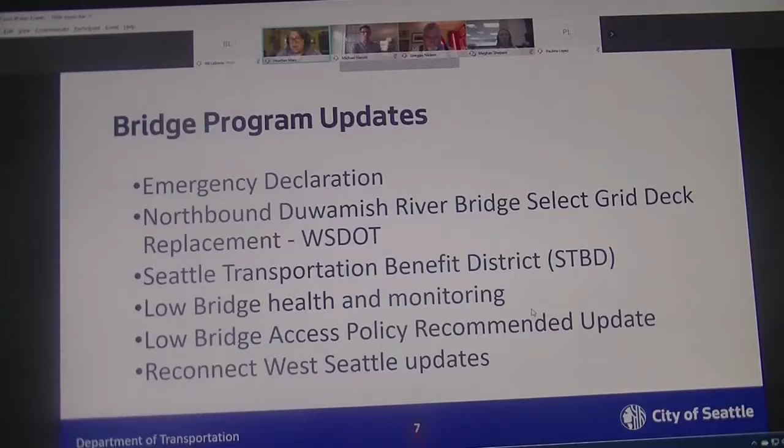I also want to talk a little bit more about the First Avenue South Bridge grid deck replacement, the Seattle Transportation Benefit District, some information about the health of the low bridge, as well as some access policy recommendations. And then I want to talk a little bit about the Reconnect West Seattle updates. So let's move on to the next slide.

So I didn't know this, but apparently it's called the Duwamish River Bridge. I think many of us refer to it as the First Avenue South Bridge. Perhaps you've heard that they are replacing those metal grates on the northbound bridge. The work started last week. We coordinated very carefully with WSDOT to ensure the work would happen at night when there would be the least impact, and fortunately we were able to open up the lower bridge so that while the First Avenue South Bridge is closed for those important repairs, you're able to use the lower bridge.

This work is going to be going on through the middle of August and through September or early October. I think we can all agree that any kind of bridge maintenance work, especially across the Duwamish, is extremely important. Even though the timing doesn't line up great with the problems with our high bridge, hopefully we can appreciate why it's so important for WSDOT to keep that First Avenue South Bridge in a state of good repair. Next slide, please.

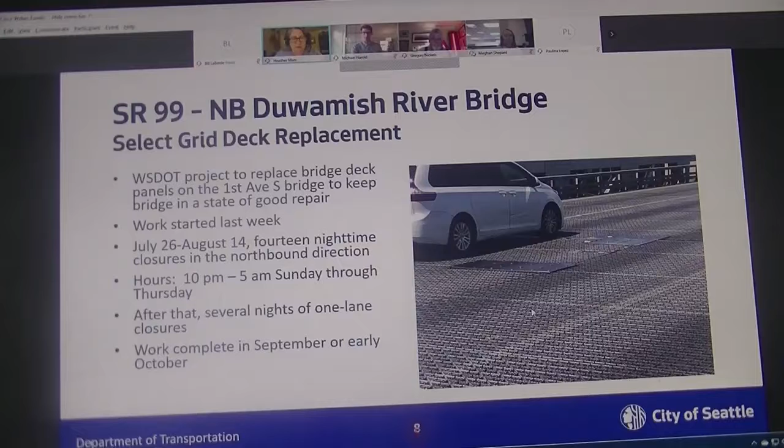This is a whole lot of detail about the Seattle Transportation Benefit District legislation that the City Council is considering right now. If they pass it through, it'll be a November ballot proposition. Our current Seattle Transportation Benefit District measure is set to expire at the end of this year. The council is considering some changes to the legislation that Mayor Durkan sent, mostly related to the term, whether it will be a 4 or 6-year transportation benefit district term, and how much the district would charge.

Most of that is going to be sales tax, but depending on what kind of response we get from the state Supreme Court, we may have a vehicle license fee there. If you have more questions about that, please put them in the chat, and Bill Laborde, who is our resident expert on this topic, can answer that.

One of the important things is that there is a lot of support within this STBD proposal that would address some acute mobility needs that we have in West Seattle and the Duwamish Valley.

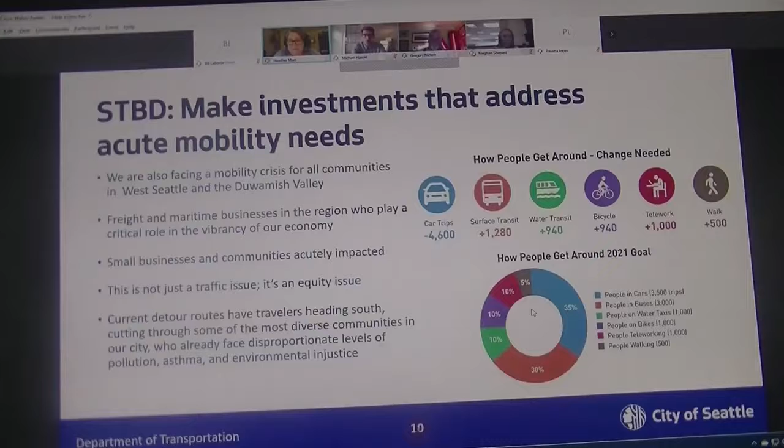So just want to mention that the Low Bridge is still under constant monitoring. I know we've spoken about this, but you may know that in updating the load rating for the Low Bridge, as was required when federal standards were improved, we identified how that structure has some limitations related to those new standards. This is not analogous to the High Bridge.

This is not a situation where we noticed some cracks and then they started growing exponentially. This was part of a normal maintenance update process. So as we learned about how the Low Bridge is not living up to those new standards, we have taken some administrative steps to protect the bridge.

The first is lowering the speed limit to 25 miles an hour. In addition, we're adding weight restrictions for the very largest trucks. They're called Overlegal 2, and we are fast tracking some strengthening measures that are going to help that.

This situation is not analogous to the High Bridge. There is not a concern right now that we have any kind of failure future for the Low Bridge. Next slide, please.

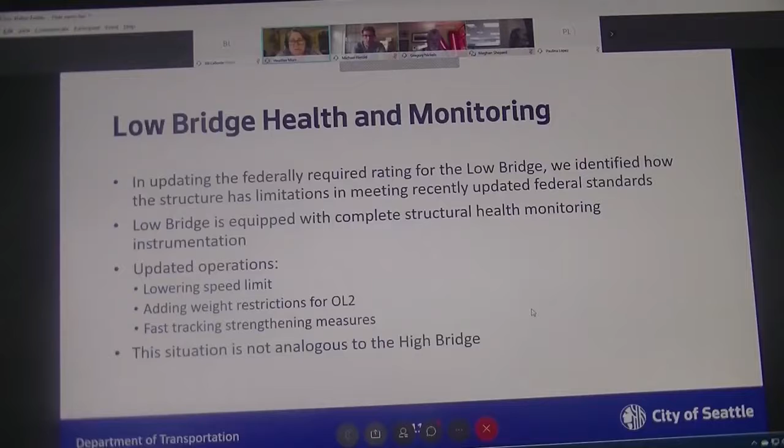This is one of those slides that we really want your input on the chat, so please do share. The Low Bridge, you may recall that at our last meeting, we expanded access to the Low Bridge. We're still having emergency vehicle response be at the very top of the priority. SPD enforces those Low Bridge restrictions at peak periods.

We expanded on June 25th access to everyone between 9 p.m. and 5 a.m., as well as school buses. And we also had the potential for others with more discussion and data sharing, proximate maritime users and employer shuttles.

Our analysis indicates that an additional 160 vehicles can use the Low Bridge at any one time. And because this is the way traffic modeling works, we have to assume that those 160 vehicles are going to show up at any given time. So we have to plan for all of them to show up at once. Next slide, please.

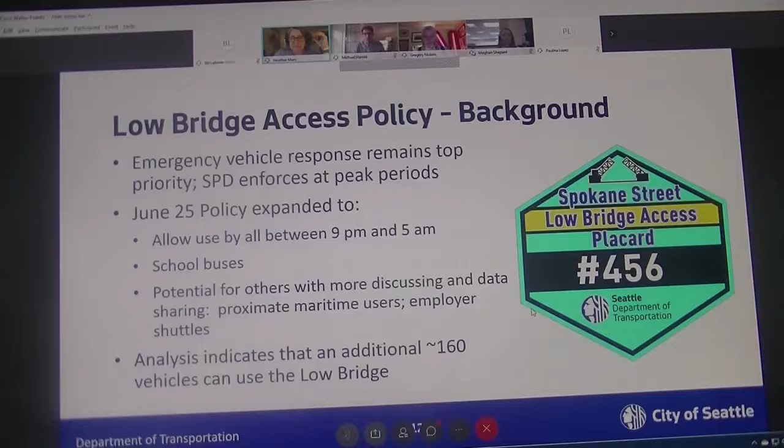So here is our most recent proposal that we have arrived at in partnership with our friends at the Office of Economic Development and the Port of Seattle. So we're going to expand Low Bridge access to 75 maritime and industrial users that have jobs that are proximate to Harbor Island. I want to make clear that this is not for commute purposes.

This is for during the day on-the-job access. We're also expanding to 22 employer-sponsored shuttles, 8 van pools of essential workers, and a total of 113 ILWU workers. We're going to print up placards.

I think there's a question from Councilmember Herbold regarding enforcement. Okay, Councilmember Herbold. I'm sorry, and my question was on the previous slide, but you might cover it more in depth later. I have been talking to Chief Best about their really important work doing enforcement during peak hours, and the fact that that has a lot of impacts on their capacity to do enforcement. In other parts of the city, they're happy to do it, but they are also very anxious to have more information about when we might shift to automated camera enforcement.

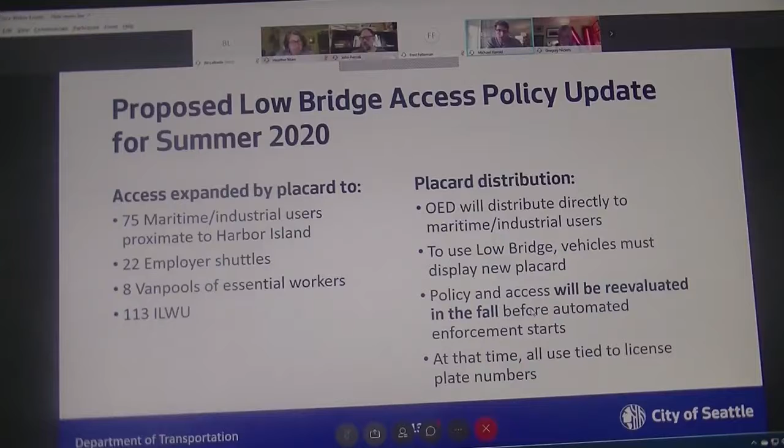Thank you. Heather, this might be one you can address, as it's something we've discussed. Councilmember Herbold, your acknowledgement that some of the projects on the neighborhood-specific plans, the maps and lists, are pre-planned projects with existing funding—how does that factor into the overall prioritization happening? That's something we've given a lot of thought to, so I'll give Heather the chance to answer.

You bet. So if projects are pre-planned and funded and underway, they're going to continue to go on. I think our interest there was to ensure that in an environment where things have changed so much, we wanted to make sure the support for those projects was still there. And as it turns out, it absolutely is still there. So those projects won't in any way count against anything—it won't mean that South Park gets less. I don't think we want to think about it from an equality standpoint; I think we want to be on an equity standpoint there.

I appreciate the input, and I want to note that the people who put these surveys together are humans, and the entire task force had an opportunity to look at those, so we're all giving each other a lot of grace. I'm sure there are projects that weren't reflected in the survey, likely because they were either too large, more than $100,000, or would take too long, longer than a year, to complete. We're trying to get through these quick build projects, these immediate needs, and this is going to be a long process. We're going to continue working with the community about what the highest priorities are with respect to traffic and changes visited on the community by the closure of the bridge.

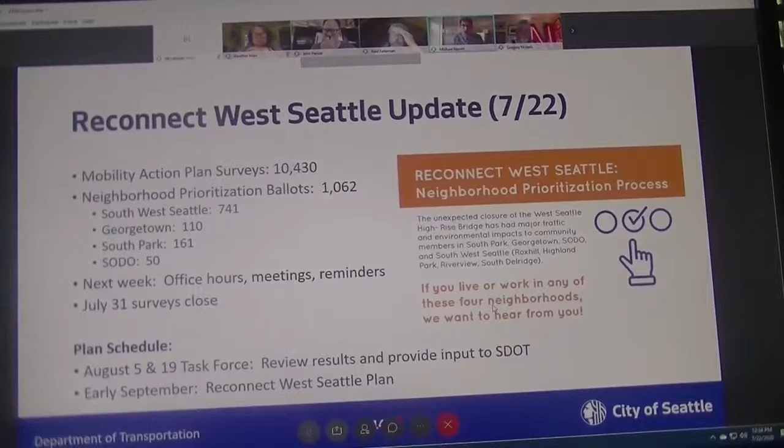There's a question with regard to traffic counts. This is from David Stock, about what traffic looks like for use of the bridge just before opening up to general use. Is there a way to inch that back earlier than 9 p.m.? Heather, I'm not sure if you want to comment on that, but I will acknowledge that SDOT looked at very closely how early in the evening and how late into the morning we could bump that window up, and this was as generous as we felt was appropriate given the need to respond to access for emergency vehicles.

We put that buffer in there, and I do want to note that this is going to be a dynamic policy that we're going to move through. I see a question from Amanda about low bridge access for local businesses in West Seattle. That's a great question, Amanda - do you want to talk about that a little bit more?

I mean, sure, I can talk about it. I'm just curious - we're giving a lot of slots, it seems, to the port, which is fine, maritime, but I think we're not addressing local businesses. For example, Husky - I know Dan owns Peel and Press - and I'm just curious how we are going to address that. I guess I don't really know how many slots are now available based upon the current suggestions.

We have 10 contingency slots right now. Amanda, what would be really great is if maybe a group like the West Seattle Chamber of Commerce could get together and put together what their request is. We're going to look at this again in the fall after we go to automated enforcement, and after that we're going to have a new number of slots available. So if the chamber or the BIA wanted to get together a proposal or a request, we would be very happy to consider that. Okay, thank you.

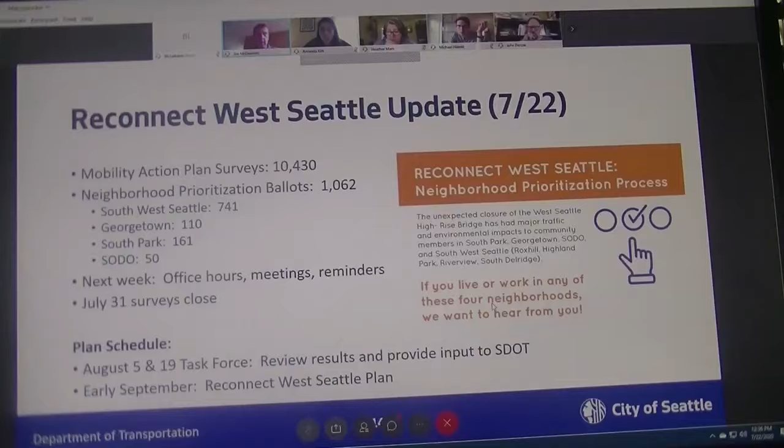Thank you, Heather. Councilmember McDermott, do you want to voice the question you put in the chat box for others? I'd be happy to. I'm very supportive of essential workers being able to move around as part of their job during their day, and sympathetic, maybe less so, for their commutes themselves.

But a number of constituents have reached out and contacted me with concern about being able to make medical appointments, from a routine doctor's appointment to cancer treatment. I got a swath of angry or upset emails one day when there was substantial midday work going on the First Avenue South Bridge. I know two constituents who were substantially late after thinking they were leaving significant time to get to procedures, and missing or needing to substantially reschedule them. I recognize private cars making a one-off visit are harder to track, but as we're talking about essential workers and commutes, I need to raise the issue of allowing people to use the lower bridge to ease their commute to essential medical appointments.

Councilmember McDermott, thank you for that question. You're right, it is a lot harder for individual vehicles. But perhaps as we move into the fall and understand more about what kind of access we can afford, we can take that up. I'd appreciate everyone's creative thinking about how to manage that. I'm not sure how, and it doesn't mean I'll never figure it out, but right now it's hard for me to conceive how we would manage that. And when we get to license plate automated enforcement, that makes it even more complicated. Candidly, right now I don't know how to administer that, but I'm open to it. So to the extent anyone on the task force has ideas there, I'm wide open to that.

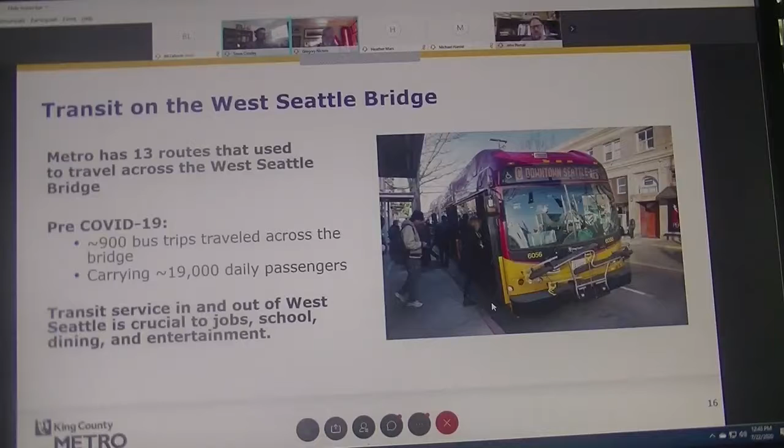So what is happening now? Essentially, all of our routes that are not suspended are currently traveling on the Low Bridge. We have had a great partnership with the City of Seattle in terms of transit priority. As you know, the Low Bridge is for transit, emergency, and freight access.

We are actually seeing very low delays and great reliability because of the enforcement on the bridge. Our travel times between West Seattle and downtown are almost basically the same as they were pre-COVID and pre-bridge closure.

As you well know, it is a swing bridge, and those openings can cause delays, and that's what we're monitoring. We're noticing about 4 per day that we're being affected by, with about 10 to 15 minutes per opening.

Another thing we're doing - and I'll get to our data analytics in just a moment - is that we monitor loads on our entire network because we are currently required to physically distance on our coaches. We have a limit of 12 passengers per 40-foot coach and 18 passengers per 60-foot coach. So we're monitoring those loads.

Within West Seattle, we haven't seen overloads of physical distancing yet, but there are other areas of Seattle, such as Route 70, the A line, the F line, and the E line, where we're actually adding supplemental trips right now to meet those physical distancing needs.

What percentage of your normal capacity does that represent? Oh boy, yes, that's a fantastic question. It is a substantial decrease in capacity.

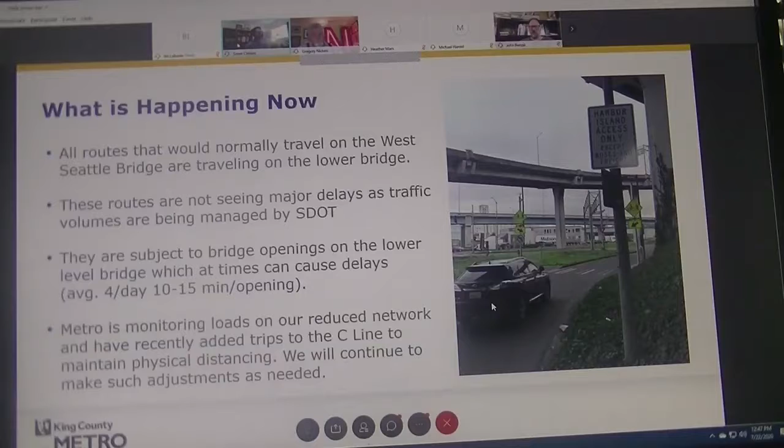As part of our action plan, we immediately set up a team to address the West Seattle response, and then we also set up a data analytics platform.

Metro uses Microsoft Power BI to analyze data analytics, and what we're currently - I have the next slide showing kind of just a highlight of a page - but what we're actually looking at is route ridership by time period. We're looking at bridge passenger loads, not just overall route ridership, but bridge passenger loads and crowding on that.

So essentially thinking about the last stop for the C Line on Avalon and Yancey, and then the first stop for the C Line over Alaska and Columbia - how full is that bus compared to how full it would be in other parts of West Seattle?

Another really important thing we're doing is monitoring segment travel times, and we're actually trying to disaggregate that even more than just stop to stop. But what that allows us to do is really assess reliability and any variance in that travel time.

And for any wonky people, we're looking at standard deviations. Basically, if the overall standard deviation of delay is increasing over a period of time, then we know that segment is becoming more unreliable. That allows us to take a look at that segment and see if any transit priority improvements could be implemented. We're also monitoring bridge openings and delays, like I said.

To see that, we're actually doing that on the First Avenue South Bridge, the South Park Bridge, and the Spokane Street Bridge. And next slide, please.

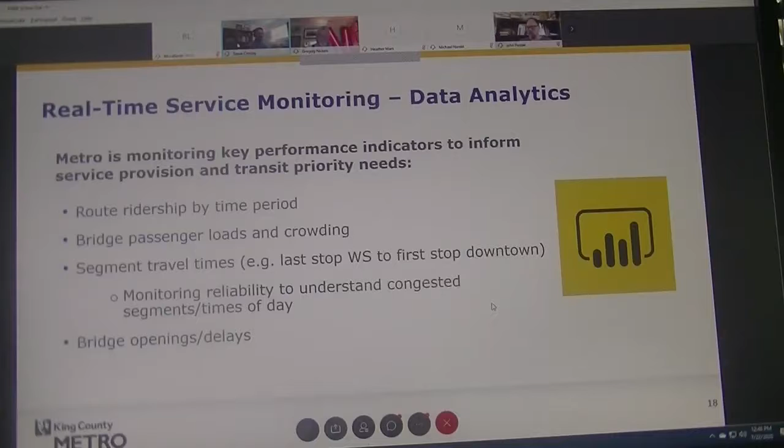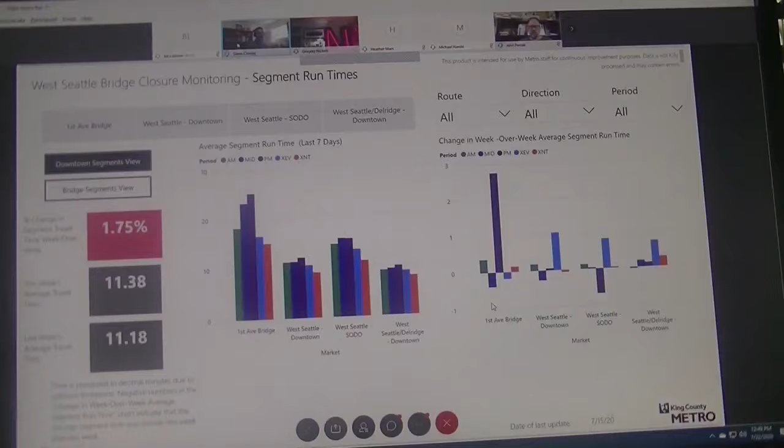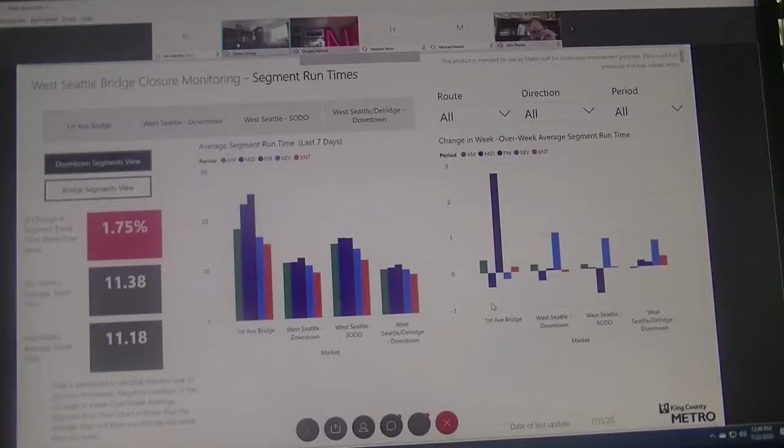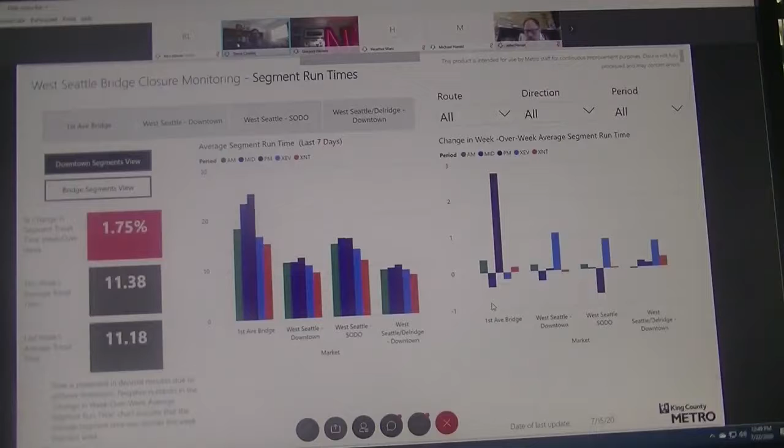So here we're going to get into Metro's response and our action plan. The day of the closure, we immediately established a West Seattle Bridge response team. I was designated as project manager. I report to Bill Bryant, manager of service development, and we all report directly up to our general manager, deputy general manager, and chief of staff on this project. We meet frequently with SDOT to identify opportunities and develop solutions - probably 3 to 4 times a week to talk about different aspects of the West Seattle response.

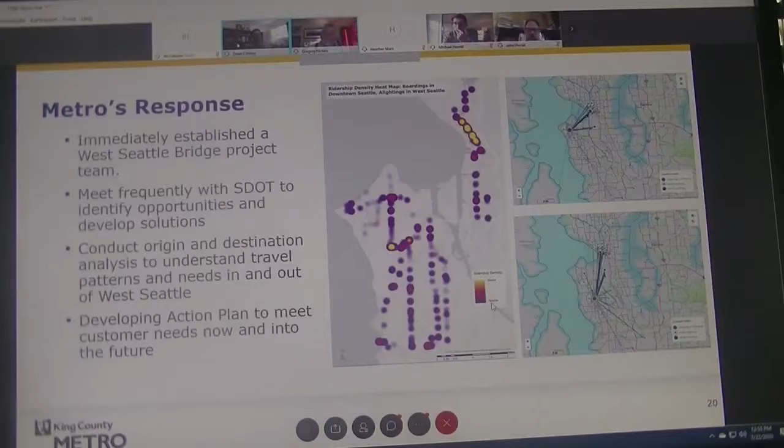So what I want to highlight about our action plan is that we are anticipating multiple scenarios. Right now, the Low Bridge is available and it's prioritized for transit and other essential traffic. And I live right in the neighborhood. I've taken the bus in and out of downtown a couple times to see how things are going, and we are very reliable. It's a really quick trip because, if anyone on the port call today, we actually have added stops on Harbor Island to provide accessibility to the marina.

Probably can't reach North Harbor Island without some sort of assistance or a shuttle, but those stops on Spokane, on Harbor Island, really provide easy walking access to the marina. So we're really hoping that the Low Bridge remains open, accessible and reliable, and that is really our best reliable pathway. But we're also planning for, and have already addressed, short-term closures of the Low Bridge. We have reroutes in place when those occur. There have been planned closures of the Low Bridge, and there have been unplanned closures, and they have been short-term closures. So we have reroutes planned to go down West Marginal Way and over the First Avenue South Bridge.

And then we have the third scenario, which we hope does not occur. And in conversations, discussions, meetings with Heather Marks, it sounds like that probably is hopefully a little bit less and less likely these days, with the city being able to hopefully wrap the structure. But if there is instability or some sort of collapse scenario and a long-term closure of the Low Bridge, we do have contingency plans for that as well.

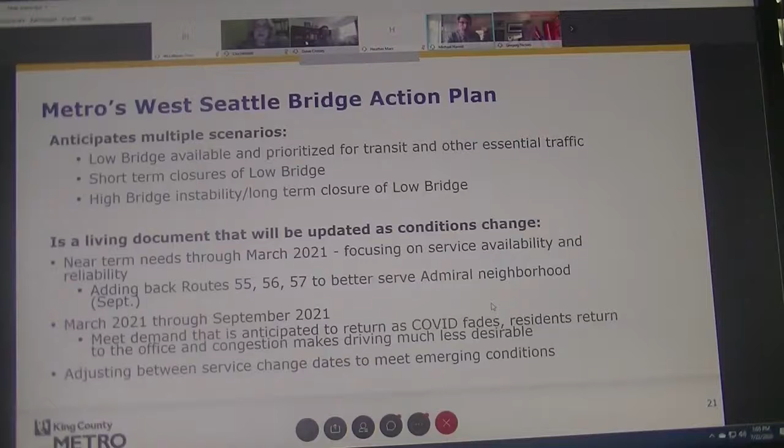So next slide, please. Very quickly, the 118 and 119 are being reconfigured on Vashon Island, so they will terminate at the Vashon ferry terminal, where you can take either the water taxi or the Washington State Ferry. The 118 and 119 will just not continue onto Fauntleroy and then into downtown.

The 116 is being suspended, and I believe that is a permanent suspension. However, if demand increases or demand can't be met by the C Line at Fauntleroy, then we do have the capacity to look at bringing those back.

Again, I wanted to highlight some specific objectives. We all know that travel between West Seattle and downtown and SoDo is really important, and we want to provide fast, reliable, and comfortable mobility solutions. It's primarily going to be on fixed route bus, RapidRide, and water taxi.

We also have good connections in downtown to get intra-Seattle and regional connections. We also want to offer van pool programs to destinations not easily reached by fixed route transit. We do have a surplus of vans available, so when that demand returns to traditional van pool, we have that capacity as well.

I also wanted to highlight that we want to ensure transit within West Seattle continues to serve all the major neighborhoods, linkages, origins and destinations. I was just looking at ridership today, and routes 120, 128 are about 50% of fall 2019 baseline, whereas bridge crossings are about 20% of fall '19 baseline. So there's still a lot of travel going on intra-West Seattle that we need to account for as well.

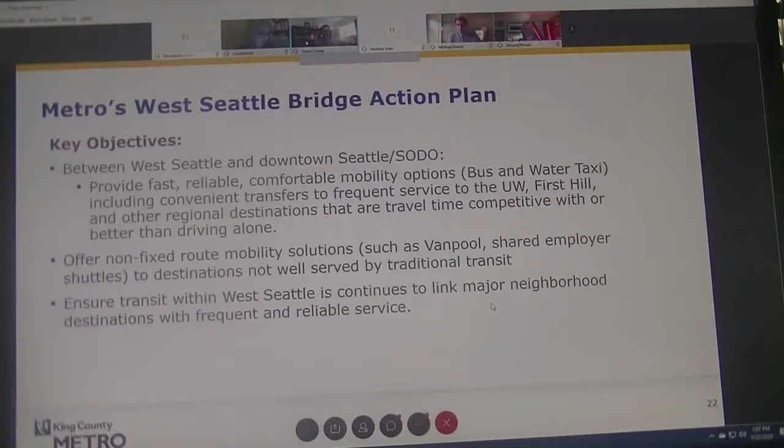We'll skip that slide. That was just our priorities, and the Metro would highlight that we do much more than just bus and water taxi. We have a whole host of solutions, including a shared shuttle employer program we'll be talking about next week with employers. We really want to look at all solutions and are very supportive of non-motorized options as well.

Here's the highlight, our customer-focused priorities. There are a lot of people riding the bus who are reliant on transit and don't have cars, and others who have just chosen to continue riding for essential or other trips. We really want to meet those needs first and foremost.

Our second priority is to really gain back those customers that we lost, which includes even a lot of Metro employees who are no longer commuting downtown, or City of Seattle employees that live in West Seattle that are no longer commuting downtown, like Heather and myself and a few other folks on this call.

The third priority is to attract those new customers who previously drove. We understand and hope there are mobility solutions much more convenient, reliable, and travel-time competitive than driving once the First Avenue South Bridge really starts to get congested. Next slide, please.

Here are the mobility solutions. We have first-last mile, van pool, and we're coordinating with the city looking at additional park and rides, etc. So anything we can do to improve mobility, adding bike lockers in key locations such as the water taxi or the junction, etc. Anything we can do to facilitate movement to frequent fixed route transit, we're all supportive of.

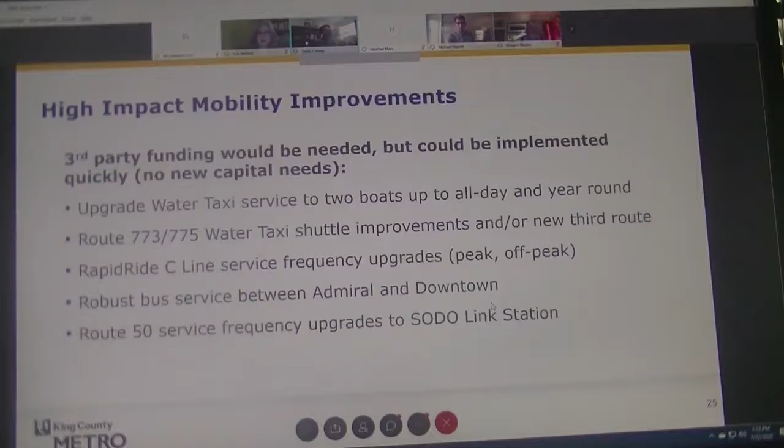Just wanted to highlight, this is the last 2 slides, and I'll answer some of those questions. Just where we're at with customer information and communication.

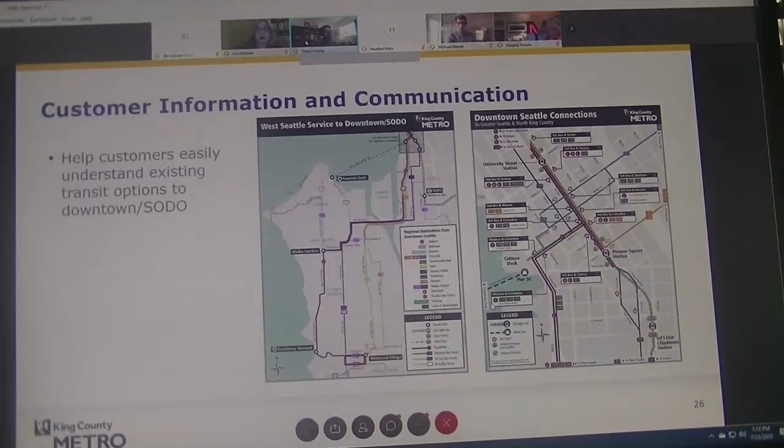So really the help here is that you can find a stop you can get off on the C Line or the 120, and say, I need to get to First Hill. How do I get to that stop on Route 12 to get to First Hill or Madison Valley or Capitol Hill? And the next slide will show us some connections to East Side and South King County.

And again, we wanted to disaggregate some of that to help the customers understand, because there's a lot of service going on 2nd Avenue, 3rd, 4th, and 5th. Really, this is to help people both coming in and out of any regional connection, how they can easily access any of those stops. And again, we also have Link stations highlighted in there as well. This is a work in progress, but we're really trying to keep things simplified for our customers.

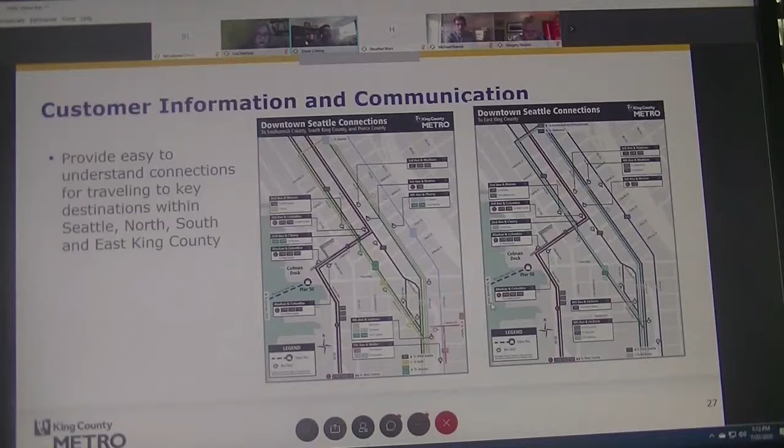I think that really sums up our overall action plan and the work that Metro has been doing. We have a really robust team made up of the Marine Division, service planning, our system impacts group, our communications group, and overall service development group. We've been really happy with the progress we've made and the coordination we have with the city. Any time remaining, I'm happy to answer remaining questions.

Thank you, Steve. We're about 3 minutes over. Okay, let's just make it an even 5. I'll give you 2 quick questions, and then I don't want to shortchange the next window of time because it's a lot of content to also get through.

So one of the questions from Representative Fitzgibbon: where might a third water taxi shuttle route go? And then from Dan: will Metro consider a route for the Alaska Junction hub to Capitol Hill for medical workers and medical appointments? Those are both great questions. Right now, there's a really good connection via Alaska Junction to the First Hill area, though of course it requires a transfer. There's obviously further discussions that can be had in terms of a transparent public process.

Again, Metro is very focused on equity and our financial constraints, and that would be a significant consideration. I think there also could be consideration for, say, a shared employer shuttle up to the First Hill area. So I think there's a lot of options available to get folks up there. I know folks do currently walk, say, from 3rd Avenue or when they come in from the water taxi up there. So that would definitely be a consideration that we're looking into.

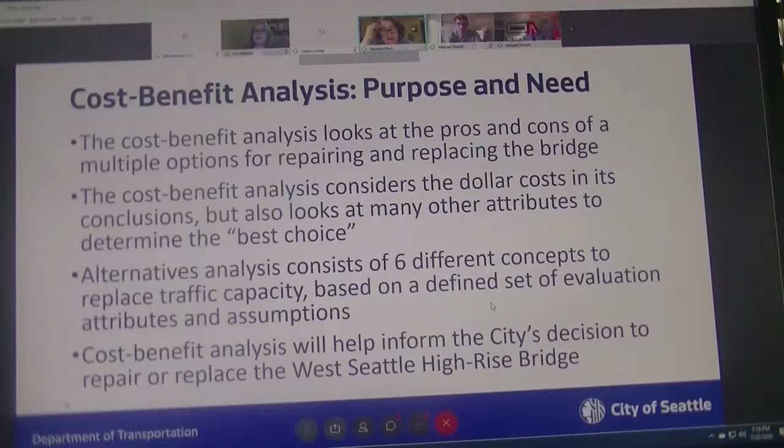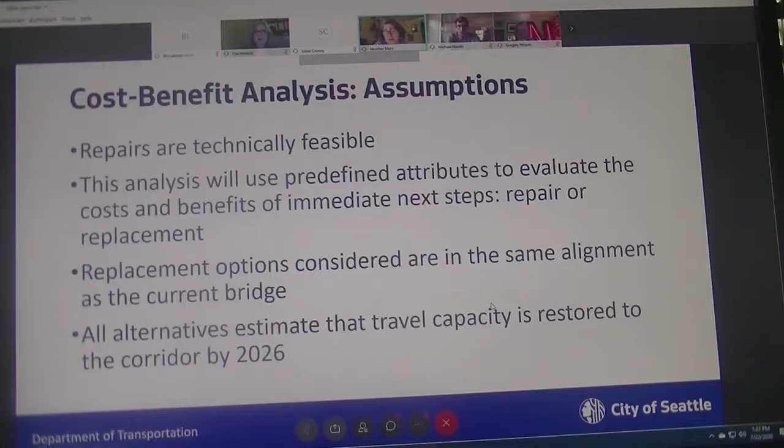If once we get through the cost-benefit analysis and have selected one of those concepts, that's where we go into a fuller exploration about alignment and materials. All alternatives estimate that travel capacity is restored to the corridor at the latest by 2026. Next slide, please.

So is everybody coming along with me so far? I know it's a lot of information to take in. So here is what is not included. This is only a qualitative analysis, only a qualitative analysis will be performed for replacement alternatives, including a bridge or a tunnel. If we decide to go down that replacement road, we will perform a type, size, and location study.

Oh my God, SDOT, why do you have to do another study? We have to do another study if we want to get federal funding, it's part of the process. And that deeper analysis will further examine the multiple replacement alternatives, including tunnel and bridge options outside of the current bridge's footprint. Based on the type, size, and location study, we'll present a number of alternatives to you so that we can reach the best option for replacement if that's the direction we've decided to go. We will then begin the design work on the preferred alternative.

So before we move to the next slide, let me just pause for a second and maybe take 2 or 3 questions if you have them, so that we can make sure we've level set.

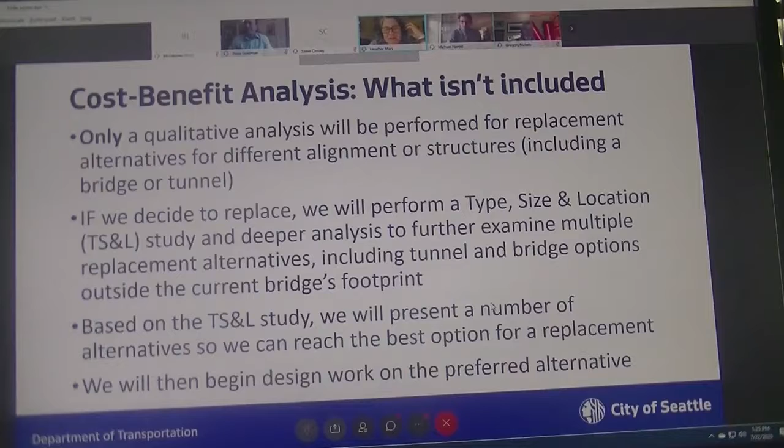Yeah, I think that's a great idea. I just wanted to, before we move on to the additional detail, make sure that everybody was sort of with me. So there. Hi, Councilmember Herbold, what do you got?

Sorry, I just wanted to get the timeline straight for decision making. The slide back on, I think it was slide 31, says that the CBA will be done in October. But what is our estimated timeline for making a decision about whether or not to proceed for repair or replacement? Are you planning that decision to be in October also? Yes. Or is that sometime after? We anticipate that we will have a decision, a recommendation, and a decision in October.

Okay, thank you. We're trying to move these things along as quickly as we can, and so some of this is a little bit fast, and we're hoping people come along with us as we try to make this decision as quickly as possible. Amanda, the quantitative analysis is going to happen in the type, size, and location.

Okay, so there are 3 scenarios: shore, repair, or replace. In shoring, we have a temporary shoring situation. There's a potential to restore traffic in 2022, and it might last 3 or so years. In the repair scenario, there are two options. One is repairs including carbon fiber wrap and external post-tensioning with foundation strengthening. That would last about 15 years and be done in 2022.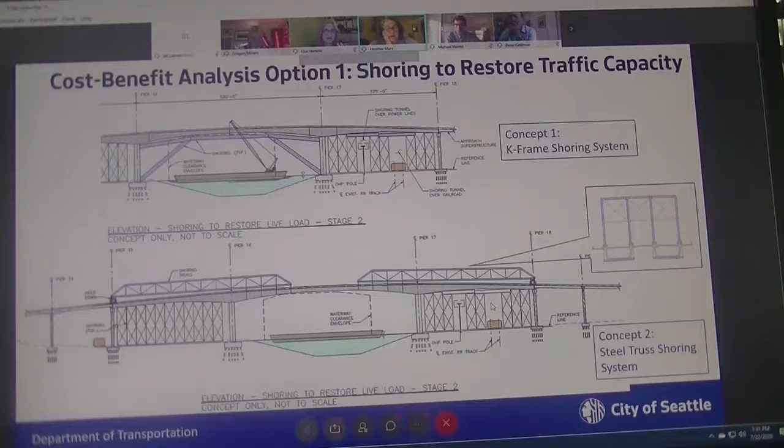Next slide, please. Let me just note that our engineers would want me to reinforce to you that these are not to scale, and they are just for illustrative purposes only, so please don't fall in love with any of these. Cost-benefit analysis option 2, this is repair to restore traffic capacity. One of the things we could do is install additional post-tensioning and stabilization.

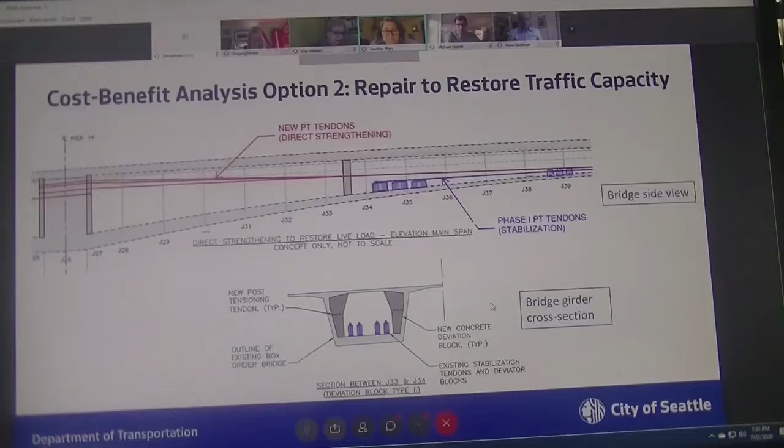Next slide, please. So the superstructure, you may remember from earlier conversations, superstructure is everything that's above the piers. So the bridge deck as well as the structural elements, in this case, concrete box girders that hold it into place. So for that middle span, we would raise a steel box girder into place.

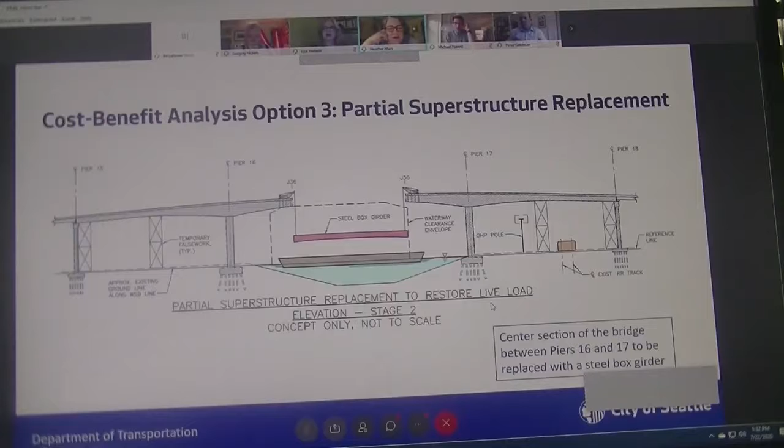Next slide, please. Option number 4, we're looking at both a concrete balanced cantilever. This is essentially replacing what we have with a similar response, so another concrete box girder. And then the second concept there is a steel box girder for the bridge. So again, full superstructure replacement.

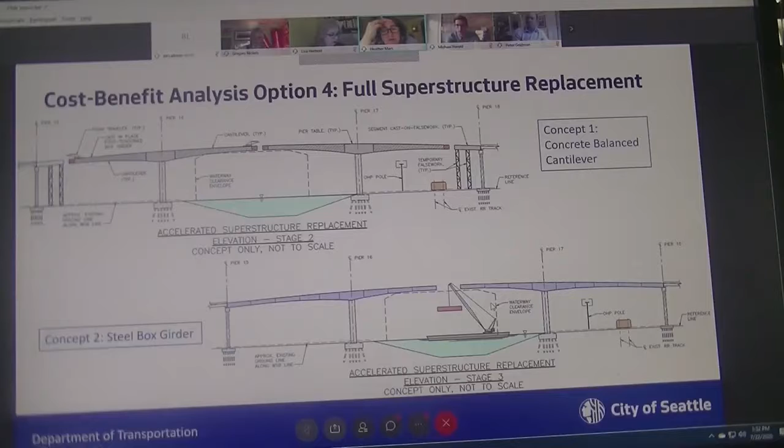Next slide, please. Option number 5 is the full replacement in the same footprint. We can all ooh and ah over the cable-stayed bridge, but these are full replacements in the same footprint: steel truss or steel truss bridge and a cable-stayed bridge. And next slide, please.

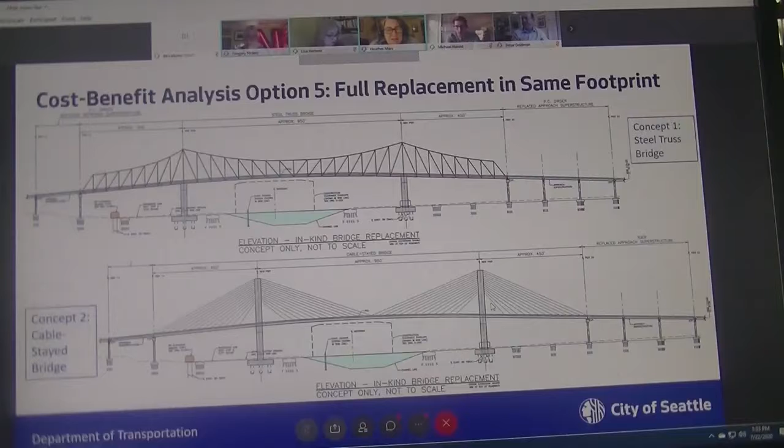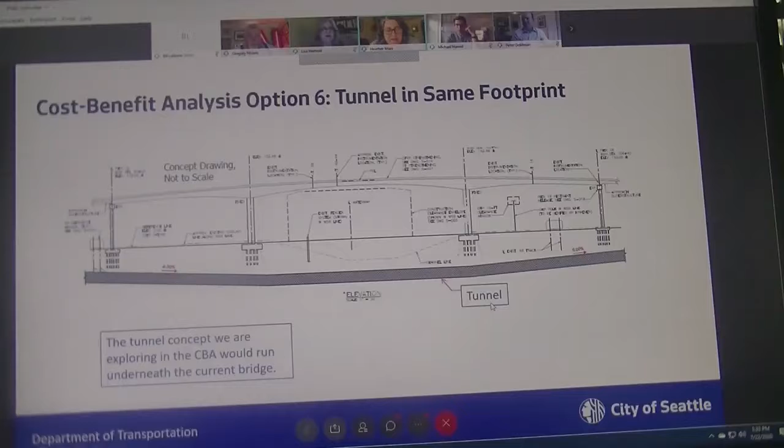So this is an option for the tunnel concept. What we're exploring for the CBA would run under the current bridge. If we decided we wanted to pursue this into the type, size, and location study, we would have more latitude to design a tunnel that would be in a different alignment. Next slide, please.

Okay, so this is the most important part of the scheme, the proposed evaluation criteria. So constructability, environmental, equity, forward compatibility. This is where forward compatibility has to do with everyone who's interested in Sound Transit, forward compatibility is that item. Funding availability, multimodal impacts, maintenance and inspection, mobility, regional business impact, and safety seismic.

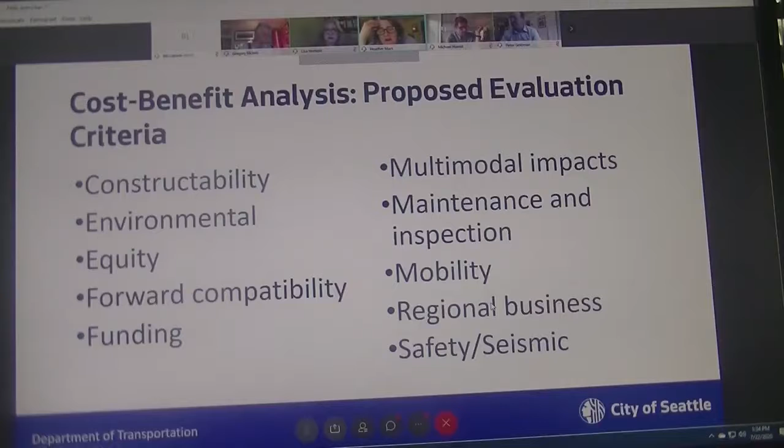And Laura, that's just for you. So let's just let that marinate for just a second. And next slide, please.

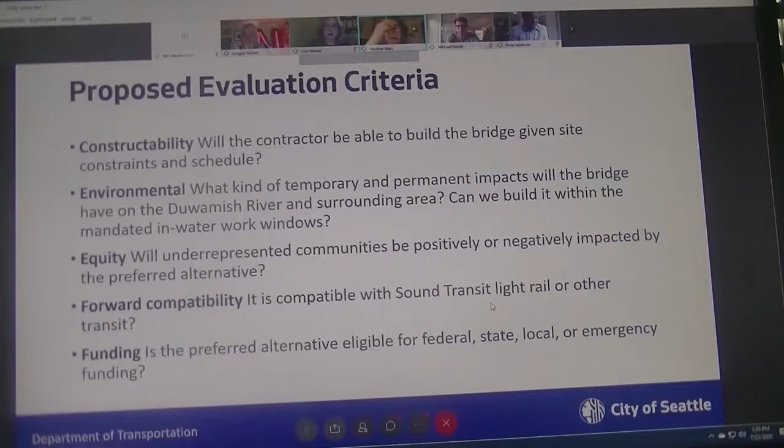Maintenance, inspection, and operation needs. What will the preferred alternative need over its lifespan in terms of maintenance and inspection? An interesting note: steel bridges have to be painted regularly, so that's an ongoing maintenance cost we would have to consider.

We would also have to consider how the new structure, whether it's a bridge or a tunnel, would connect to existing infrastructure and existing street networks.

Mobility. Does the preferred alternative facilitate or hinder the movement of people and goods? How will it impact current local and regional traffic?

Multimodality. Will the preferred alternative accommodate multiple modes of transportation, including transit, pedestrian, and vehicle traffic?

Regional business. How will the preferred alternative impact regional and local businesses as pertains to the movement of people and goods and overall access? Will it impact the ship channel? Will construction affect business access?

And then finally, safety and seismic. What seismic standards will the preferred alternative have to meet?

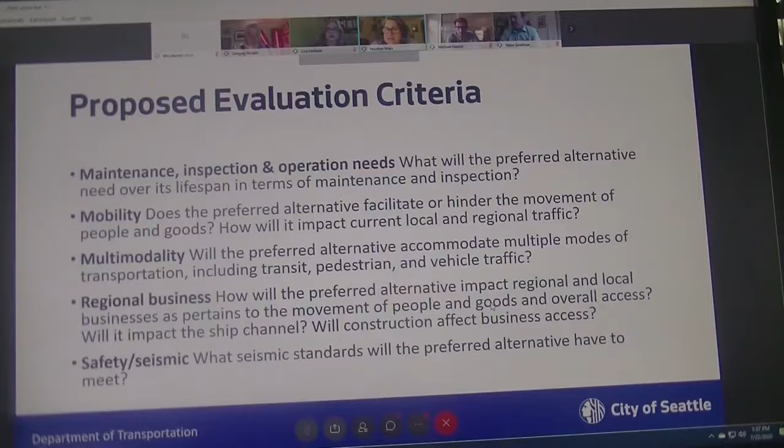Now we turn those attributes into weighting. If you look down the left side of this matrix, you'll see all of the attributes listed. The ratings shown are for illustration only—don't panic, we haven't done this yet.

How we engage with this is that you compare each criteria against each other criteria. All the criteria have been given a letter, so you compare bridge maintenance, inspection, and operation to constructability, and decide which is more important. You put the letter of the winner in that box. Then you compare bridge maintenance, inspection, and operation to environmental, which wins, and so on until the matrix is filled out.

Then you count how many times the letter in question shows up. So across from bridge maintenance and inspection, which has the letter A, you count up all the A's in the matrix and put them in that yellow total box. Their A shows up 2 times, so the total is 2. You fill all of those down, then convert those into percentages, and that is the weight factor each criteria gets in the analysis. Does that make sense?

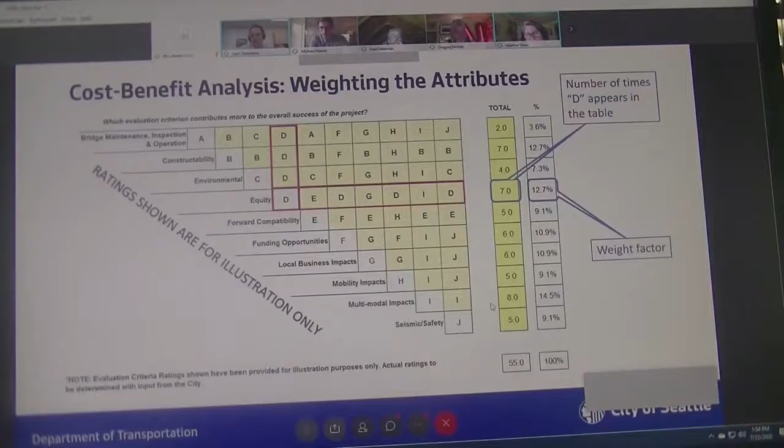And like Heather said, we'll do that with the community task force. We'll do that with our technical advisory panel. We'll do that within SDOT, and be able to see where and how we might be placing different values, because this is really a value system. Then for each project, each alternative or scenario, we will be able to evaluate the costs and the relative impacts, and then use that weighting criteria to come up with a final number or range of numbers.

So once the evaluation rating criteria are set, we don't adjust those for the different scenarios. The scenarios have different relative benefits associated with them, or impacts, effects thereof.

I also want to address, and Matt's going to do it in the chat as well, a little bit more on the tunnel and the reason about apples to apples. I don't think we know yet enough to know what the construction type of a tunnel would be. So we're trying to make some educated assumptions at this point about the constructability, or how they would be built, what exact construction type we would end up with. We need, at this scale, to get enough information that we have apples to apples comparison, and at the same time keep moving forward on the type, size, and location work that we've received proposals from consultant firms, and we'll continue that as fast as we can. We don't have people under contract yet, but that is where we'll get into some of those details.

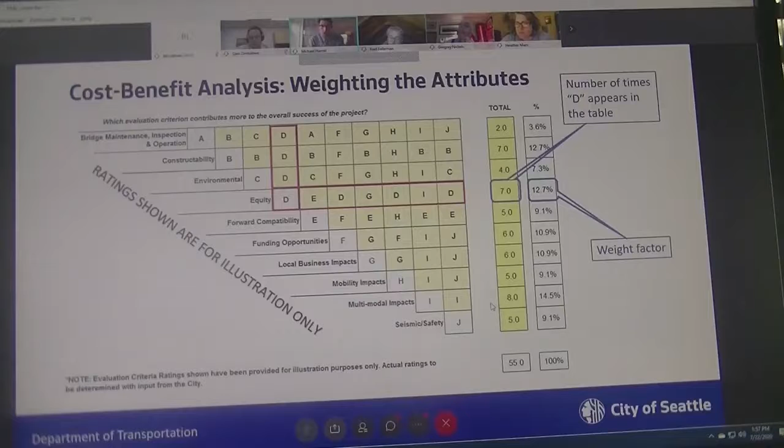Thank you, Sam. We have just a few moments before we're going to transition to breakout groups, but I do want to lump in a couple of additional questions as they relate to the CBA. First of which, Megan, can you provide everyone with a reminder for the window of time here for additional feedback?

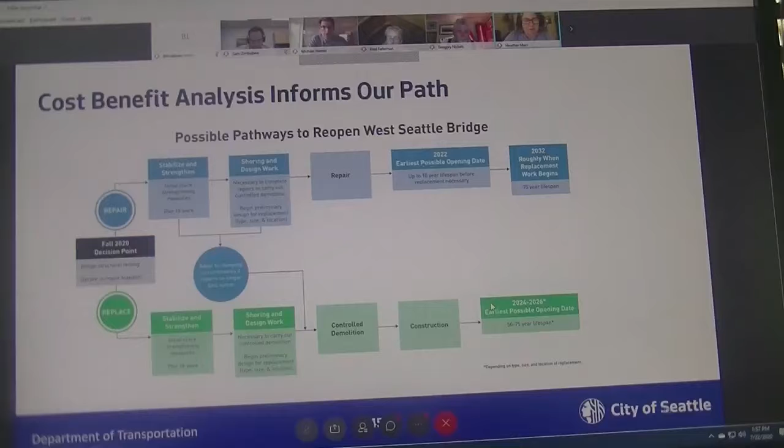We actually have a slide where we can talk about that. So why don't we move on to the next slide, which will be familiar to all of you, our decision tree. So the cost-benefit analysis is the tool that we are going to use to inform our repair versus replace decision. So this is the moment.

And so I encourage everybody to really examine this. And like I said, we'll send out a blank Excel spreadsheet so that you can play with it and see how that changes the weighting, because Sam's exactly right. The ultimate goal of that matrix is that final right-hand column that listed the weighting. That's how we're deciding which criteria in the analysis is the most important. So take some time with that. I'm available to you for phone conversations if you need a thought partner on it. I'm a verbal processor, so I always appreciate having someone to talk to about things like this.